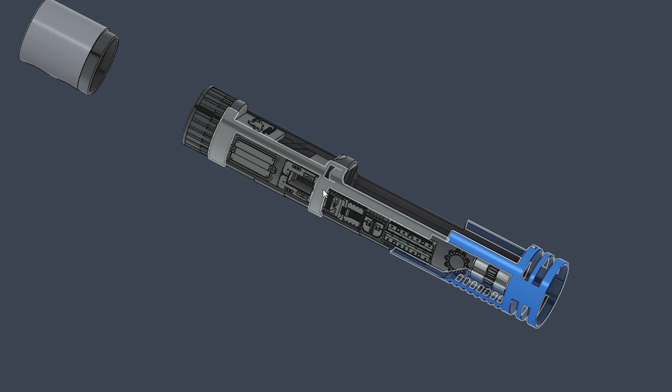So this is the chassis. It's hard to tell because I've already put a bunch of ridges and greeblies on this, but this lower section is a different diameter than the upper section. You can kind of tell by doing a top-down look at the chassis itself. That lower section is this larger diameter piece, and then as you come up, it offsets a little bit.

So designing the chassis for this was a little bit interesting. I knew that we didn't have a lot of room in the upper part of the hilt, so I chose to forego any kind of blinkies or anything like that and just concentrate on a lot of greebly work.

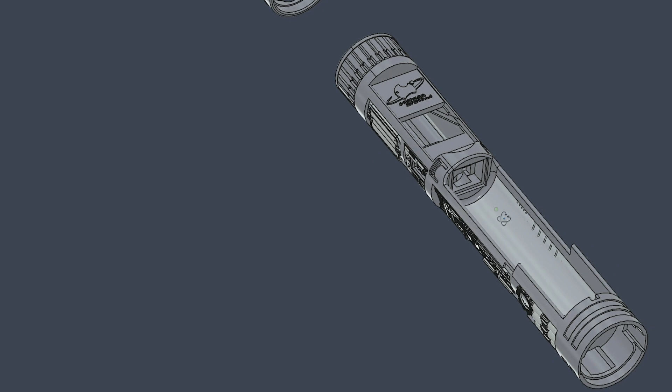I did do a kicked Proffie in this particular install. I like doing those with tight builds. So we've got a kicked Proffie board here, it just slides in this sled. Here is our battery tray.

Plenty of room for a 24 millimeter speaker. That is the other interesting thing about this hilt. The pommel section is just over 26 millimeters, so not quite enough room for a 28 millimeter speaker, but plenty of room to do a fully enclosed 24 millimeter speaker. And the 24 actually sounds really great in this hilt. This is a really, really phenomenal hilt.

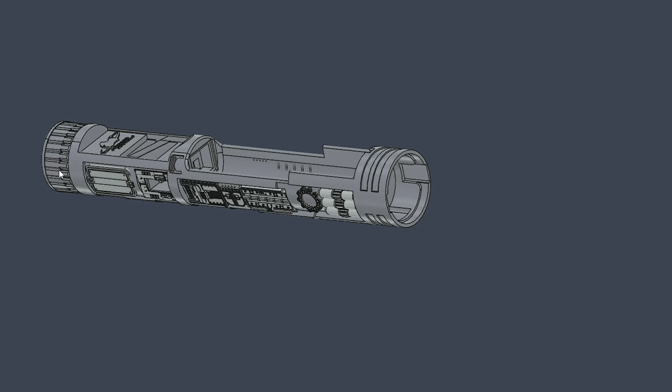So typical Tim greebly work along both sides of the chassis, and as we make our way up to the top, we've got a 6-rail PCB. This is from Smugglers Outpost.

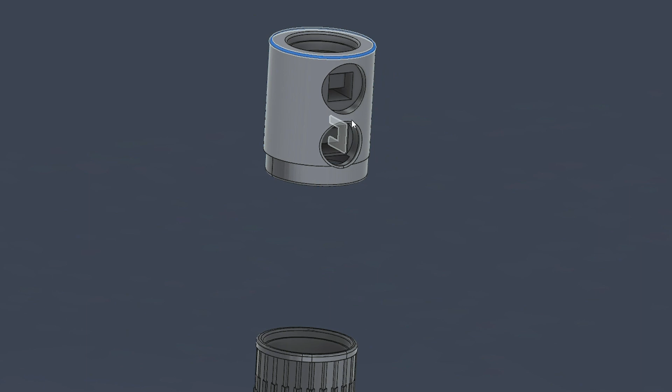This upper section was another challenge for me to design for. You've got two spring plunger switches in the upper section of the hilt. So what I did to make this a removable chassis, I didn't want to put switches on the chassis, and I didn't want a super long chassis or anything like that. So I chose to do an inner chassis that holds not only the PCB emitter, but the male end of the 6-rail PCB.

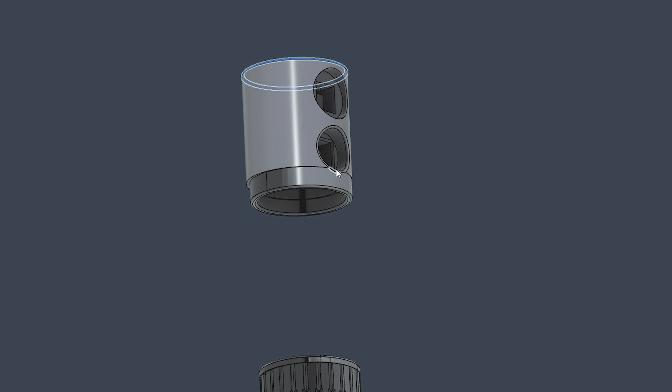I also had to embed some tactile switches in this so that those plunger switches on the outside of the hilt could make contact with them, at two different depths. I'm not gonna lie, I did two test prints of this PCB holder because I just did not get the depth right for the switches.

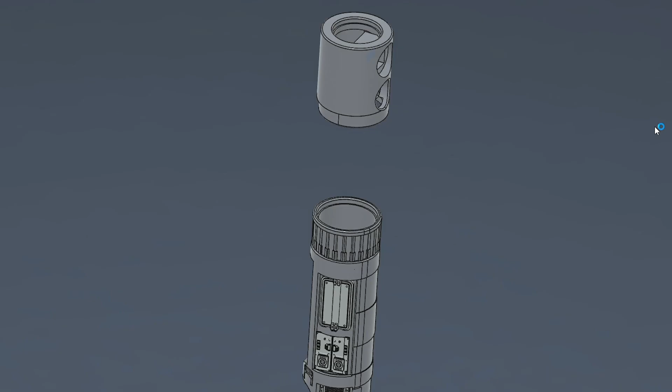But finally, after that second print, I figured out a depth that worked for me. That's one of the beauties of having a resin printer on hand - I can easily print prototype parts.

So that's it, right? That is the chassis. Very interesting chassis. Let's come up top and talk about it really quick. So here it is, this is the KR Sabers Fortis. It's probably full of fingerprints already - it is a chrome plated brass shroud, so it's a fingerprint magnet. But with that being said, it is a very, very beautiful hilt.

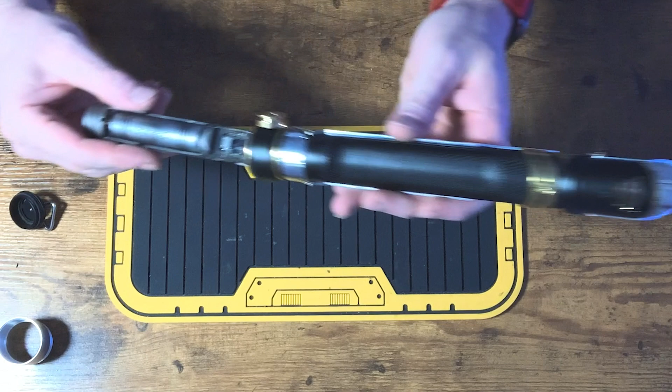I do want to talk about the chassis first, right? So here is the chassis. I just did my typical pass of pewter and silver, or pewter and onyx rub and buff on this. It gives it a nice gunmetal look, right?

Here's our Proffie board. There is a kill switch in this build. Battery trays here, and there's our 6-rail PCB.

It's hard to tell by just looking at it like this, but you've got a different inner diameter in this section. You can kind of tell if you look at the grip. This is another really interesting thing about this hilt that I like - this grip. It's a really, really unique feeling grip, but you can tell it steps down and then steps back up. There's an angular portion of the grip, so I had to design the chassis around that. But I'm pretty happy with the result. It's a really, really unique hilt.

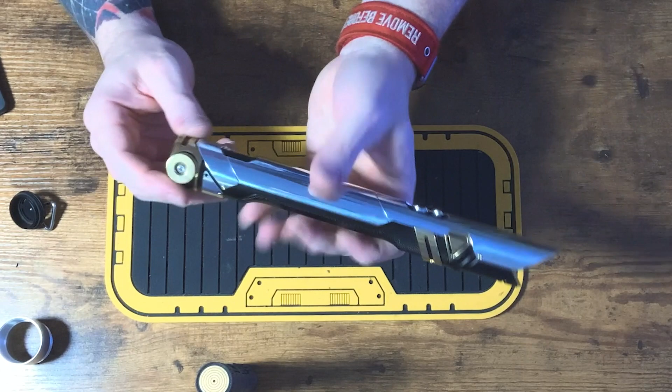So to use your chassis, spring side is your negative. Take the flat part of your battery, put it in that battery tray. This is a Proffie V3 board. So you do have to put this chassis in a certain way - make sure the battery is facing towards the knurled section of the hilt. Slide the chassis in until it stops, and then you take your pommel and just thread that in, and you're ready to go.

Come down to the bottom. So twist to activate, twist to deactivate are on.

Let's see what else we put on here. I don't know how to explain it - okay, nice long post off there. It's just a very unique feeling hilt. It's unlike any other hilt I've held. Wow.